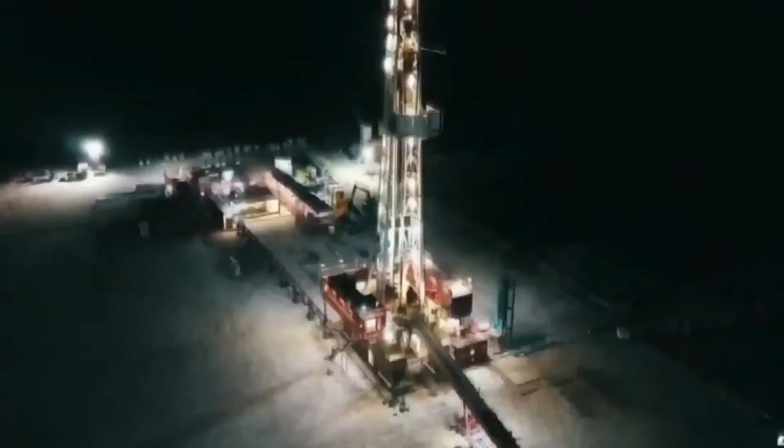Hello, everybody, and welcome to the V-Door Locksmith Show. I'm your host, David Gibson, where we are unlocking the secrets to success in the oil and gas industry, one interview, one technical presentation, one technical screw-up at a time.

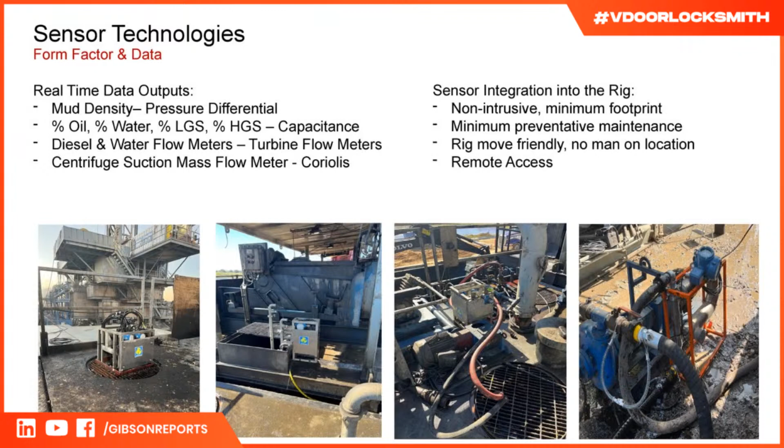Next slide. Excellent, oh there we go. So I didn't want it to be a marketing ploy or anything like that, but I did want to put a couple of pictures of the latest solutions that we've come up with. And I can go back a little bit and talk about where all this came from.

So years ago, we've tried it all, right? We've tried the skid mounted version, we've tried the trailer mounted version, we've tried big Coriolis meters in the flow line and on the suction line. And what we've landed on is that while those solutions have good data quality, the client would prefer a slimmed down, small footprint, easy to move solution with no real issues with doing a rig move or a rig skid.

And where we landed is that some of these technologies are very simple, right? Bernoulli's pressure differential, tried and true, 300 years old - we can measure density using pressure differential. We can measure percent water, percent oil, which we use to calculate our low gravity solids, high gravity solids - we use a capacitance sensor for that. For all of our diesel and water totalizers, we use a conventional turbine flow meter, very simple. And for our centrifuge applications, for our effluent and suction on the centrifuge side, we use Coriolis. So the idea of slimming things down and integrating into the rig, that's what's important. The more that we can put sensors and have them integrated holistically into the rig design, that would be the ultimate solution, right?

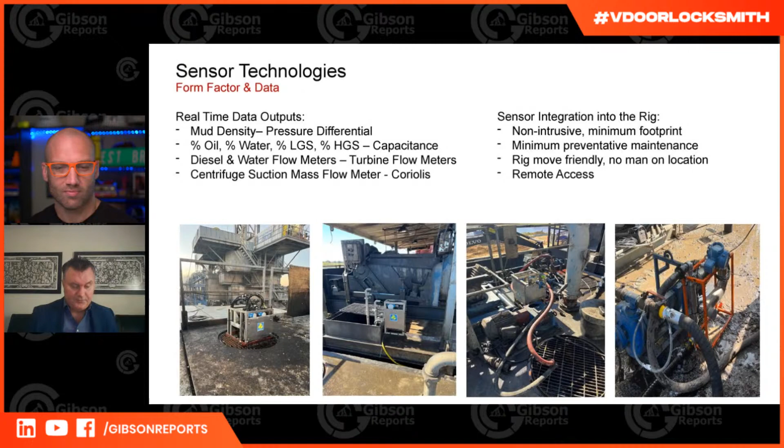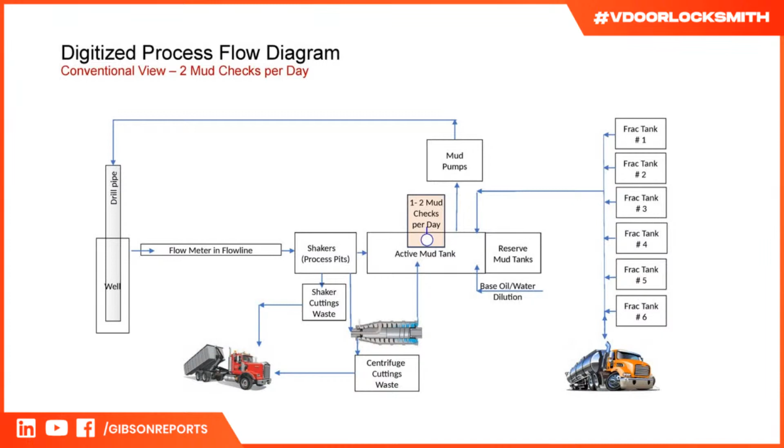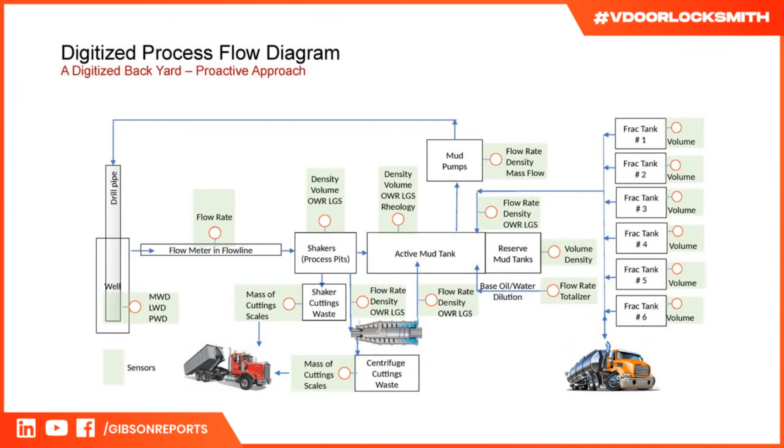The next slide basically says, all right, in a process-controlled environment, where can we place sensors strategically to give us the maximum data? What I mean is when you have data in multiple places, it's easier to make inferences. So you don't need to measure everything—you can measure here, measure there, and calculate what's going on. For example, what's going in and out of a centrifuge—you can calculate what's going down the slide as a waste stream. You don't need to measure it directly; you use a material balance. I'll get into that on the next go-around.

But to me, if we're going to look at drilling holes in the ground from a proactive perspective, one or two mud checks a day is not going to keep up with the 300 to 400 feet an hour rates of penetration that we're currently doing. We're going to need all this data. We're going to need everything in order to achieve that technical limit.

So one of the things I wrote for a note, I made the comment that all this data is necessary, right? If you want to optimize hydraulics, if you want to optimize trip speed monitoring, if you want to optimize hole cleaning, or you name whatever calculations that you're currently doing using static data, when you start plugging real-time data into some of these models, you're going to see a drastically different result. You're going to see things that you've never seen before.

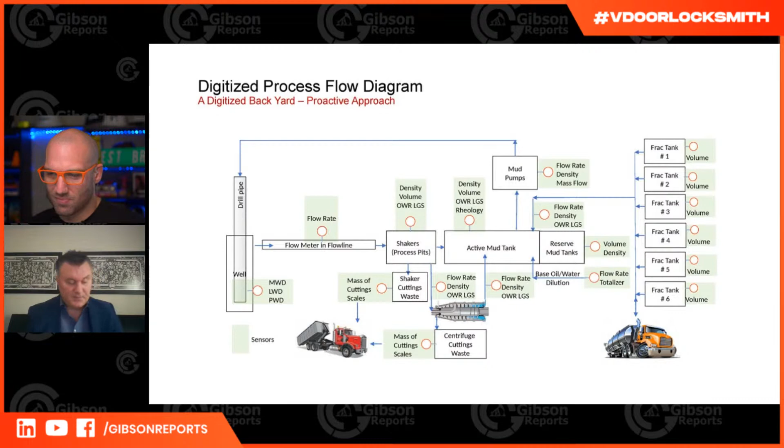Next slide. Yes, sir.

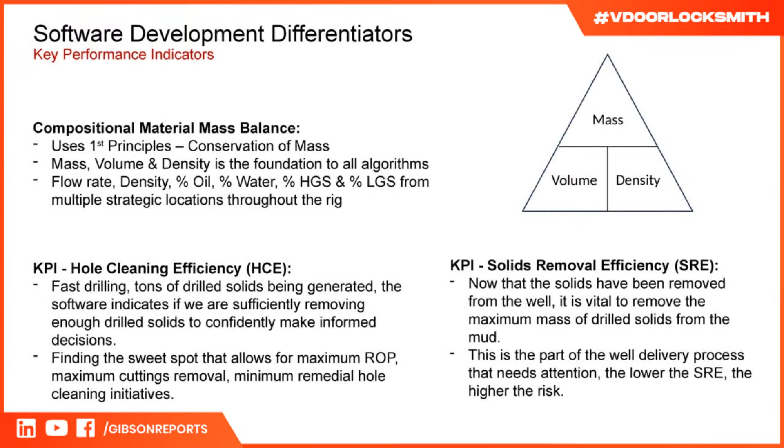So we've spent a lot of time working on software, right? And we felt like we didn't need to spend any time on hydraulics. We didn't need to spend any time on trip speed monitoring. Somebody else has already got that perfected. But the gap that we've seen in our space is the backyard. I can't find any piece of software on this planet that looks at it holistically from a material mass balance, using first principles, right? The conservation of mass. All we needed was mass, volume, and density, right? And we're able to do a whole host of things that we believe are important.

And at the end of the day, the two key performance indicators that we think have the most value is you got a hole cleaning efficiency, you're going to drill fast, you're going to create all these cuttings, so now you got to get them out of the well, right? Equally important is, well, now that you got all those cuttings out of the well, you got to get them out of the mud. And by doing a material mass balance, we can tell you what's going back, what we're pumping back down the well. We can tell you what is coming out of the well. We can tell you then what your solids removal efficiency is at surface based on your dilution, how much product you're adding, how much waste is going out as a waste stream, right?

So Jason, to interrupt real quick, why do you think it is that there's that gap there? Like you said, there's stuff that talks about trip speeds, there's stuff that talks about torque and drag, and tons of other software. Why do you think that this portion of the industry has been ignored?

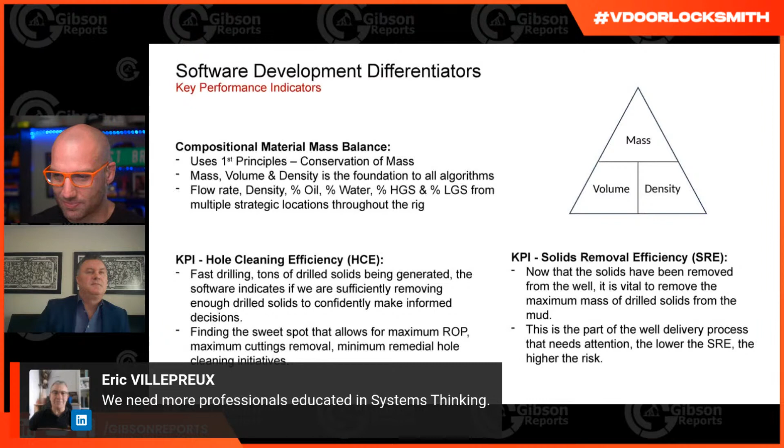Eric here says we need more professionals educated in systems thinking. There you go. So, all right, I'll let you keep going. Did you lose your train of thought?

So I got a little note here saying that this is not about the volume of solids removed, this is about the volume of solids not removed, right? So when that fluid goes down the pipe and picks up all those cuttings off the bottom of the bit and they start going north, problem one is how much of these solids are not getting removed from the well. That's what's causing all of your drilling performance issues, like rate of penetration slower, directional control is worse, so you got this porpoising going on with your directional tools.

So then let's just say 20% of those solids that make it back to surface don't get removed at the shakers, and now you're pumping them back down the well. So all we're doing is compounding the problem at the bit by continuing to drill fast, continuing to add more drill cuttings to that annular space, and also adding this volume of solids that's being pumped back down the well to compound our problem. So it's got everything to do with the solids that are not removed on that first pass.

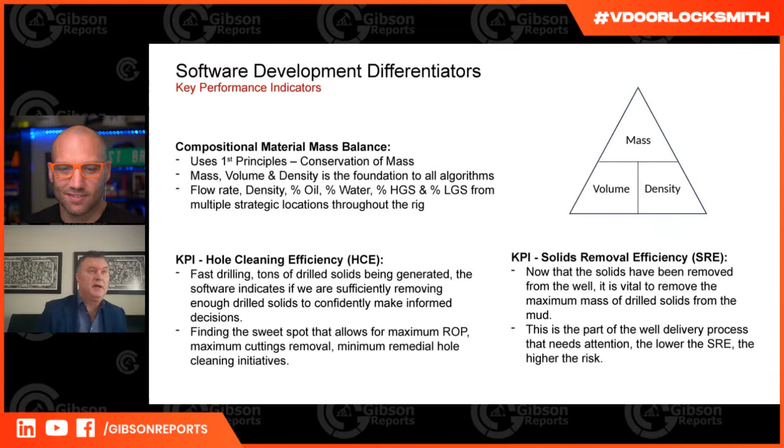Here's what's going in and out of your mud system, and we can quantify how much rock you generated, how much rock you removed, how much solids is still in your mud, how much waste is going out as a waste stream. What's the performance of your centrifuge? Are you at maximum efficiency? And all of that is, in my opinion, simple. Anybody can do it. It took us a while - we've been 10 years doing this - but it's not magic, and it's not anything really proprietary. It's just pure math. Next slide, sir.

Like I said, we have two components, right? We've got two KPIs - the solids removal efficiency at surface, and the solids removal efficiency in the hole, or hole cleaning efficiency. And what we've done is created this algorithm, with a few assumptions, obviously.

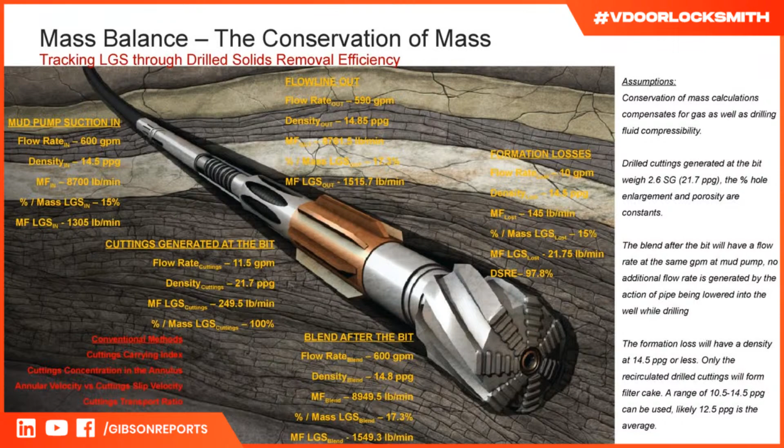What we've done is said, all right, if we know what we're generating in the active mud pit, we know what our low gravity solids are, we know what our density is, we know what our flow is. We can calculate the mass flow of water, the mass flow of oil, the mass flow of high gravity solids, the mass flow of low gravity solids.

And if you follow it all the way through the process, and do the necessary compensations due to the material balance for gas compensation, compressibility, etc., porosity, permeability, get into the details all along that path of fluid going down the pipe, picking up the drill cuttings, bringing them back to surface - we can track this all the way along.

And we've got a few assumptions, like I said, that we have to abide by. And no doubt, the more we work with it, the more we'll be able to tweak it and get better. But at the end of the day...

Conventionally, we've always used pressure, right? If you look at any of these conventional methods - cuttings carrying index, cuttings concentration in the annulus, annular velocity versus cuttings slip velocity, cuttings transport ratio, equivalent circulating density, your torque and drag, pick up, slack off - all of these are based off of pressure and rheology.

Or pressure and hydraulics. And what we're doing is saying, all right, let's just couple the material balance, or cross-reference if you will, the material balance against conventional methods. And now you've got one that can help you validate the other, in the hole, in real time.

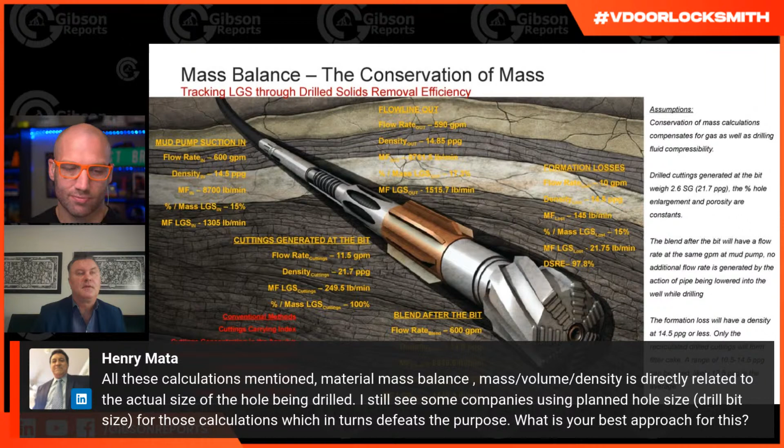Interesting question, right? Victor spent eons working on these formulas. What we did is build an upper and lower limit on our ranges for several of the assumptions. When you've got porosity at 15% versus 20%, or others I'm trying to think of off the top of my head - when you make a change to many of the assumptions from a lower to upper limit, the end result was very small, like say 1% on the hole cleaning efficiency output, to go from the lower limit to the upper limit, until you get to hole size.

The biggest contributor to a hole cleaning algorithm is the hole size. And what is your percent washout, right? We don't have a good answer except to occasionally run a caliper sweep.

You can always do those carbide or rice bombs just to get a general idea - how long did it take for that sweep to go all the way around? Then just back-calculate - that tells you, well, obviously it was 3 minutes late, therefore it must be 6% open hole volume, open hole enlargement. I don't know of any other way offhand, but it's a good question, because it is the biggest contributor to a hole cleaning algorithm using mass balance.

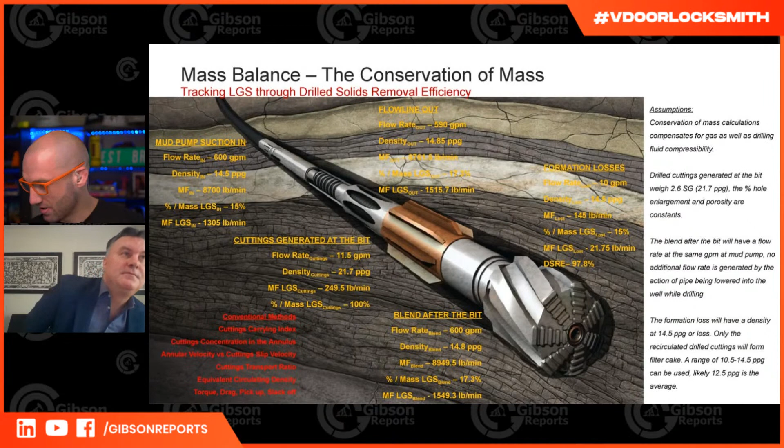So it's the same mass of solids that's not being removed that can cause all the drilling performance issues that we see. Taking some notes here. Good stuff, next slide.

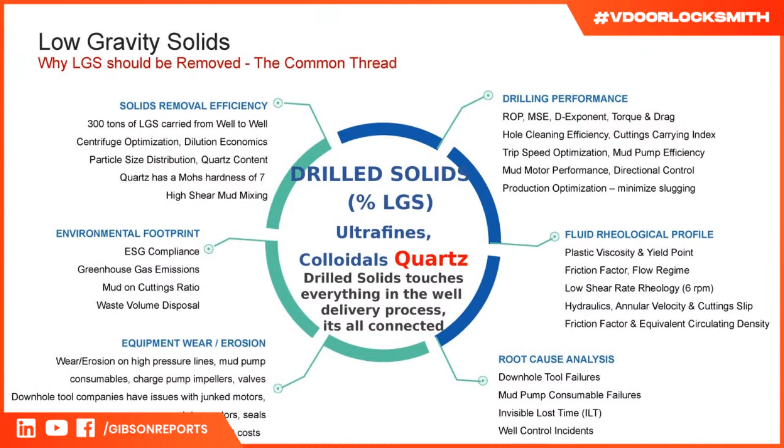So why should we remove more drill solids? What exactly do drill solids touch throughout the day? Obviously we've got drilling performance, ROP, MSE, D exponent, torque and drag, hole cleaning, cuttings carrying index. All these things that can affect drilling performance are impacted by the concentration of solids in the mud. Well documented, right? It impacts your fluid rheological profile, which in turn impacts all your drilling performance numbers.

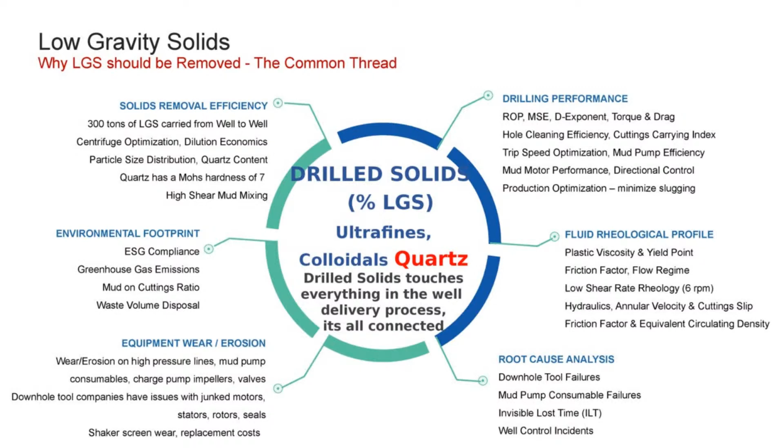We've got this root cause analysis portion that came into our funnel recently in the past couple months, where drilling contractors and downhole tool folks would like to have some sort of a paper trail that shows them what's going on with the mud in relation to their downhole tool failure, for example. So having this paper trail of measuring low gravity solids in real time could certainly help the cause for those guys needing to understand what exactly is tearing up their motors.

So if you look at equipment wear and erosion, the drilling contractors got a huge big problem here where on the high pressure lines, the mud pump consumables, charge pump impellers, valves, all of these things are getting worn out because of solids. And in my opinion, it's specifically the quartz that's causing all the grief here.

One of the things I wanted to note is that barite by itself in the silo, if you grabbed a sample of it, can contain as much as 20% low gravity solids right out of the silo. And then when you test that with XRF technology - what's XRF? X-ray fluorescence - it measures, we can quantify the amount of quartz that's in a barite sample, and we've seen it at 10 to 15% pure quartz in a barite sample.

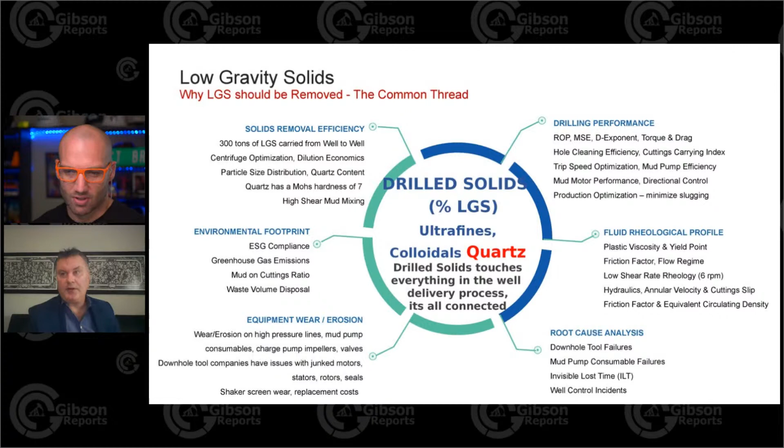Next slide. Are we good for time, sir? I've got like 4 more to go, I think. I've got all day, so don't bother me. All right, the next place, and Eric will be happy with this one.

So I started paying attention to the number of truckloads of waste going from the rig to the waste management facility, and started tracking them and adding them up. And I assigned a miles per gallon on a typical diesel pusher, and came up with estimated CO2 emissions from waste hauling.

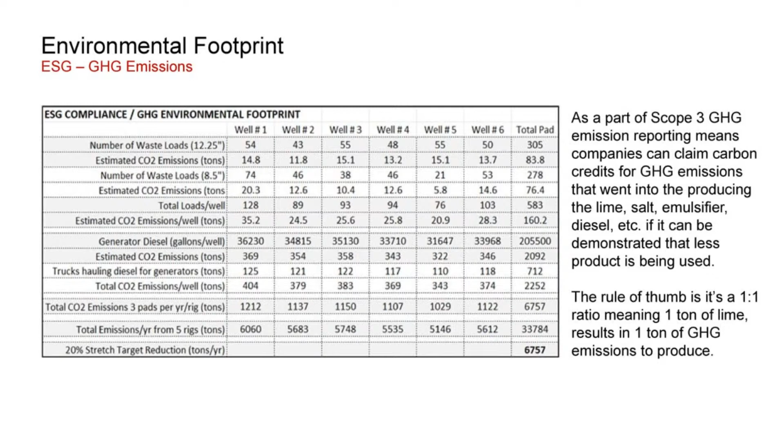You can do the same thing for product hauling. If you're hauling barite, lime, and salt, and these products are being brought from the warehouse to the rig, that too is burning diesel, emitting CO2. You've got the diesel generators producing energy on the rig, and as the mud system gets loaded up with drill solids, the generator works harder and requires more diesel. So you've got trucks emitting diesel bringing diesel to feed the generator, and you're also emitting diesel from the generator itself. You start adding up all these points of contact where we are emitting CO2.

Then you look at what I did - I took a stretch target. If a client has 5 rigs running, and each rig generates X amount of tons of CO2 per year, we make a stretch target, say 20%, shaving that off across the board in savings, in efficiencies, in making things better. Then here's the amount of CO2 we could save.

So the carbon credits you could achieve from using or emitting less greenhouse gas - one of the things I recently got with Eric on is this Scope 3 greenhouse gas emission reporting. It means they can claim carbon credits for greenhouse gas emissions that went into producing that lime, that salt, that emulsifier, that diesel. And if they can demonstrate they've used less of it, they can capture it. The rule of thumb right now is 1-to-1, meaning about 1 ton of greenhouse gas for every ton of product produced. So it's just a number.

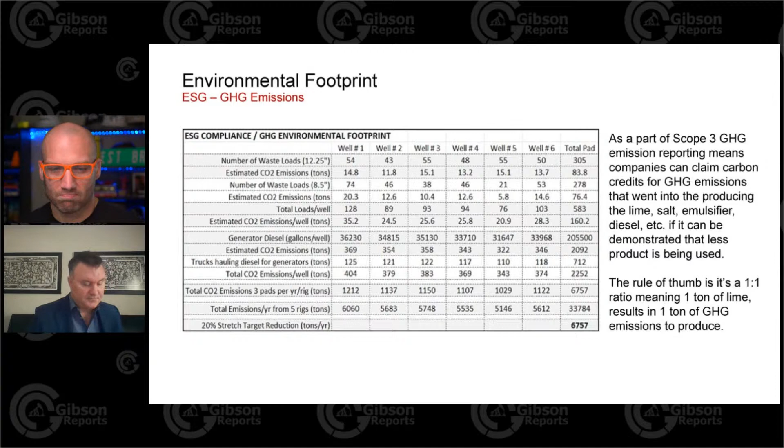Next slide. Yes, sir.

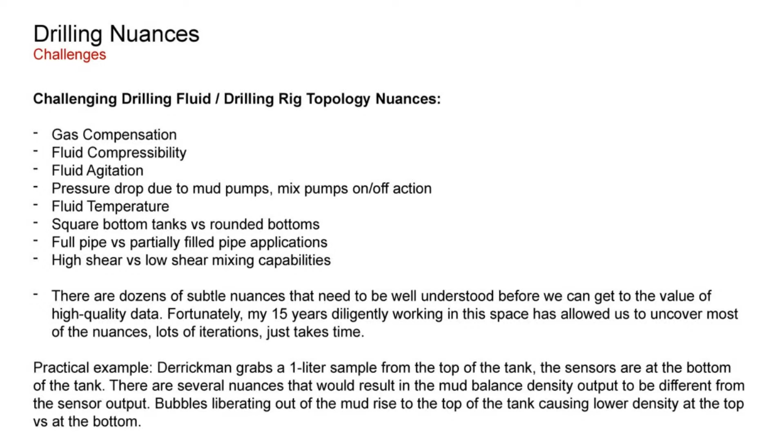One of the things I can do is a technology transfer, if you will. We've been doing this a long time, and we broke a lot of things along the way, and we continue to break a lot of things along the way. But at the end of the day, every time we break something, we learn something.

And these little nuances I talk about are about getting to the right answer, mathematically, using physics, math, science, whatever word you want to use. We compensate for gas, for fluid compressibility, agitation in the pits. We see pressure drop differences due to mud pumps and mix pumps being on or off, and all of these things will affect your data - fluid temperature, square bottom tanks versus round bottom tanks, full pipes versus partially filled pipes, high shear versus low shear.

All of these things, I can give people an insight as to when you're out there trying to get data out of a sensor and you can't figure out why you can't get the same result as what the mud engineer or the derrickman gets. There's a reason for it. In order to get to the high value, high quality data, you have to understand these subtle nuances first. Fortunately, a lot of years working in this space allowed us to uncover most of these nuances.

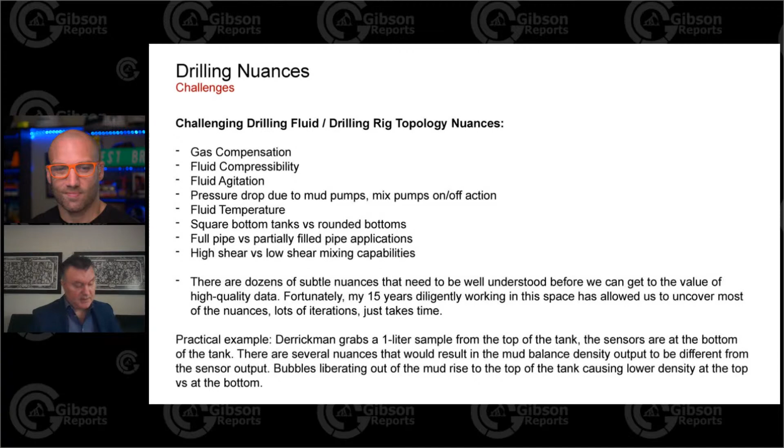I guess you gotta take it with a grain of salt. I think in one of my slides, the last slide, maybe it's the next slide. It is the next slide. Go to the next slide. Okay.

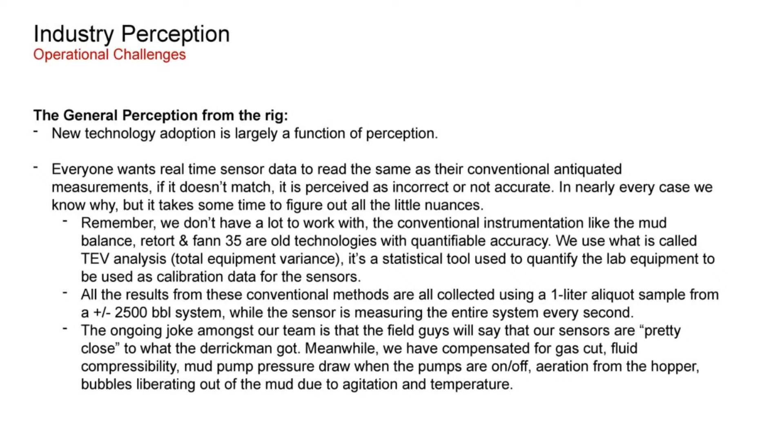So the perception then, when you got a derrickman grabbing a sample and that mud sample doesn't end up being the same as what the sensor is reading, the first thing he's going to do is say, well, if it doesn't match, it's perceived as being incorrect or not accurate. So my answer to that is, remember, we don't have a lot to work with here.

The conventional instrumentation, like a mud balance or a retort or a Fann 35, these are old, antiquated technologies. And we had to do things like this TEV analysis, which is total equipment variance. If you go to any other industry and they're measuring their process control sensors against their lab equipment, the first thing they do is a statistical analysis on what the actual accuracy is of the reference data. So when we ran the TEV analysis on the mud balance and the retort and the Fann 35, we came up with like a 5, 7, 10 mil retort can have 9% error.

So my point is, when we're out there in the field, be cognizant that the reference data that you're comparing to, which is a mud balance or a 10 mil retort or a Fann 35, has its inherent error. So you got to be cognizant, don't throw out the sensor right away. There's likely nothing wrong with it. Your problem is the reference data you're using to calibrate it.

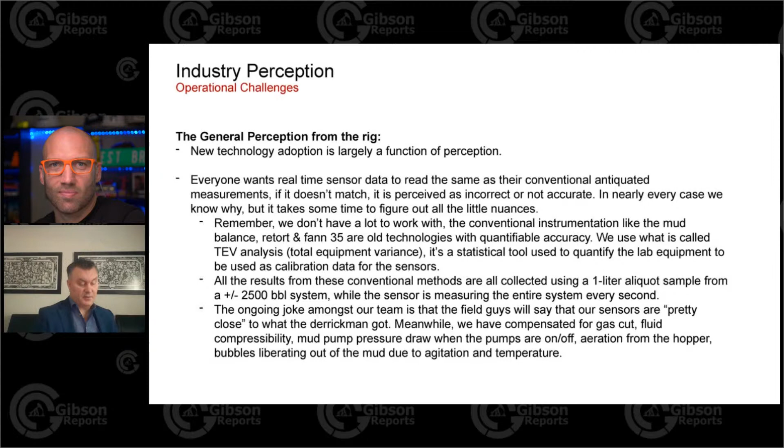Last slide. Yes, sir. So final thoughts, right?